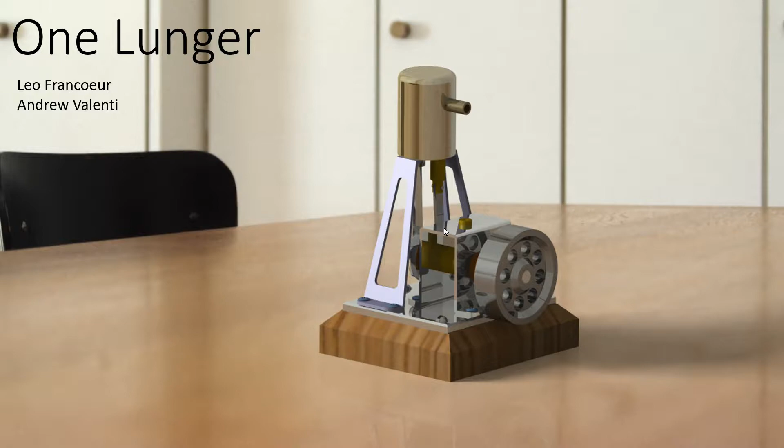The project that we did in Section 1 was the one-lunger engine. The one-lunger engine is a single-piston, four-stroke engine. This particular one is a model. Here you can see our assembly fully put together.

As you can see, there is one piston pumping up and down, and another yellow piece pumping up and down, which is a valve which allows fuel to enter and exit the engine. As we go below it, you can further see the piston pumping up and down at a faster rate than the valve, allowing for 2 strokes for every 1 stroke of the valve, as this is a 4-stroke engine.

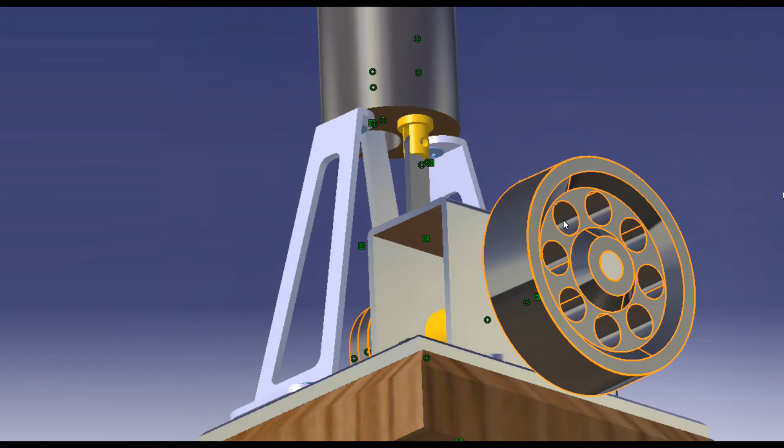As we continue to watch the engine turn, you can see all the parts that hold the engine together, including 2 cylinder holding brackets, and a bearing bracket to make sure that the flywheel stays straight the entire time.

For the part design of the one-lunger engine, most of the base features of the parts were cylindrical in shape. So the shaft tool was mainly utilized to rotate a profile, and then features were added to the part, most commonly holes for screws to fit through or shaft bearings.

The most difficult piece to create in this project was the cylinder holding bracket, mainly because it was missing fillet dimensions, as well as its widthwise dimension was incorrect with allowing it to fit inside the assembly with the other pieces, so the dimensions had to be slightly modified for that one width.

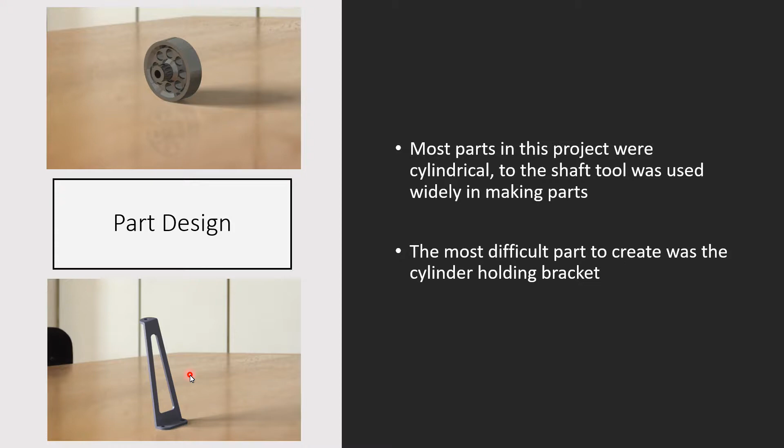As Andrew just mentioned, the cylinder holding bracket had several incorrect dimensions, or dimensions that were incorrectly defined, or conflicting dimensions. One of the dimensions that I would like to bring to your attention is this 17 right here. This view here was provided to us in the dimension drawings that were provided for us to create the parts. It took us a while to figure this out, but this is actually an unfolded sheet metal view. It's something that's commonly used in sheet metal design, but not commonly used a lot of other places.

So this 17 here actually has the length of the flat surface, like an auxiliary view would, of the actual slanted plane, along with the top view of the flat plane here. You can kind of see down here what I'm talking about. So the 17 would go from about there to there, while the rest of it would be this 8.8 here.

Now, one of the dimensions that was actually incorrect about this part was the 30 millimeter dimension here. Originally, this dimension was 30 millimeters, when in reality, it should have been 30.4. We figured this out when we tried to put the piece together in assembly design and realized that this screw here didn't line up with the actual cylinder that the piston went into. So if our screw holes aren't lining up, then obviously the part must be wrong.

Then we had to go back and spend several attempts trying to figure out how to finally make this piece correctly. Eventually, once we realized that this dimension was incorrect, it became a little bit easier and our holes lined up, and we were able to figure out what was happening with the part.

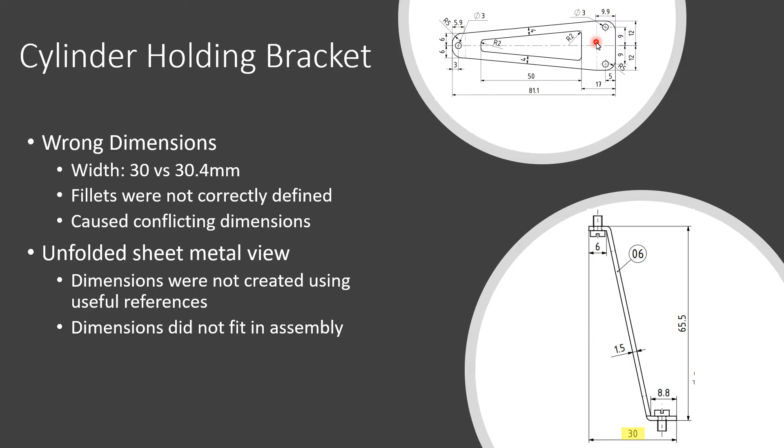As I just mentioned, that unfolded sheet metal view isn't really helpful in machining this piece or in modeling this piece at all. The better way to go about dimensioning it, as I discovered, was to make an auxiliary view. So these are my dimension drawings that you see in these 2 little bubbles. The first one is the front view down here, and then I also made an auxiliary view AA over here,

which allowed me to properly define the top of this little cutout here to the bottom of the piece, as well as the bottom of the cutout to the bottom of the piece, and the thickness of the walls. That saved me from doing a lot of trigonometry and a lot of extra unnecessary math in that unfolded view.

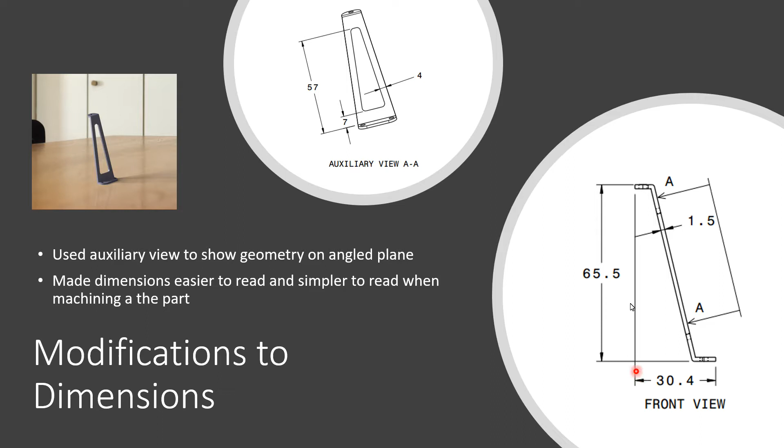Yet, still, I can get the same information that I could have gotten out of an unfolded view by getting dimensions like this 65.5 and this 30.4, which has been corrected since we had issues with it being 30 millimeters previously.

The main assembly for the one-lunger steam engine was broken up into 5 individual parts in the assembly, as well as 3 sub-assemblies. The first of the 3 sub-assemblies is the frame of the engine, which consists of static parts that are concentrically constrained to keep them concentric with the screws in the holes, and contact constraints to have the surfaces touching that will be screwed together.

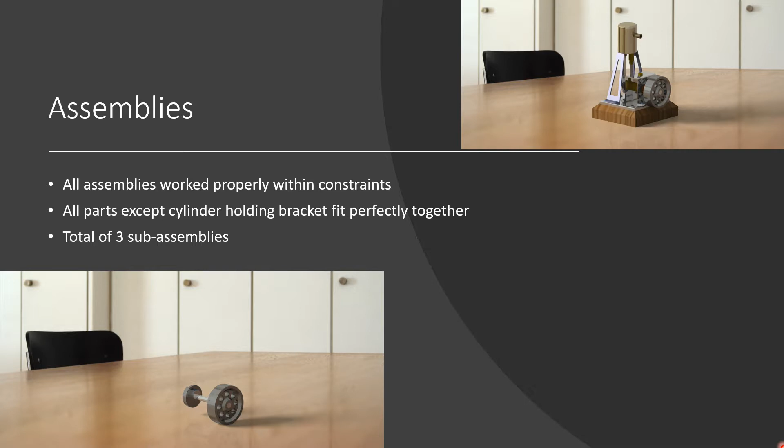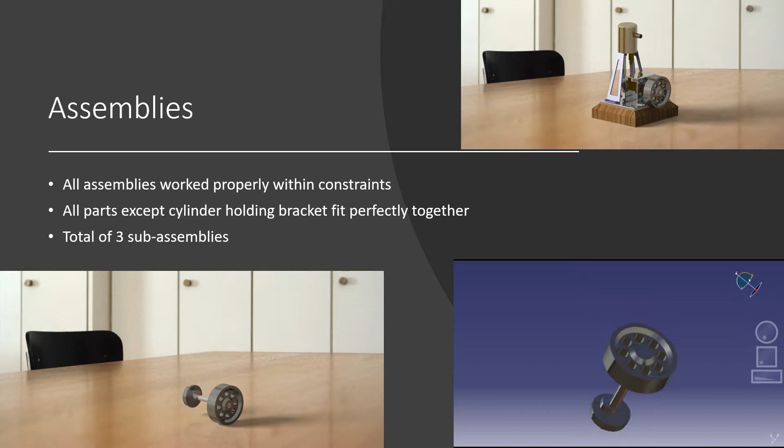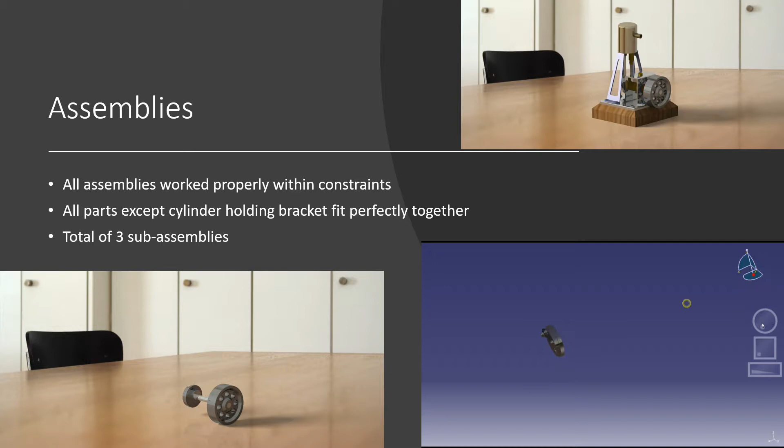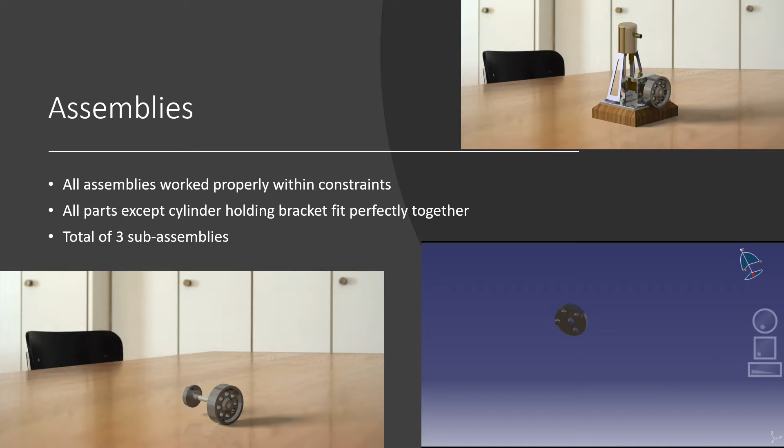The second assembly is the shaft assembly, which uses the concentric constraint to have everything centered around the shaft, as well as an offset constraint to position everything accordingly, as well as angle constraints to have everything properly offset angle-wise from each other. The third assembly is the crank plate that is actually inside of the shaft assembly, and it is the counterweight and the main part of the crank weight fastened together with 3 screws.

As I had stated earlier, one of the goals of dimensioning that we had was to make all the parts easier to model and easier to machine. One of the big issues with making parts easy to machine is not calling out the center of holes from edges. A lot of times when we were looking at the dimensions that we had to make the parts, we noticed that holes were being dimensioned to the edge instead of to the center. Obviously, you can't put a drill bit on the edge of a hole and expect a hole that has a center a little off from that. That's not how drills work.

So we dimensioned everything to the center lines of holes and did our best to do symmetrical dimensioning for pieces that were symmetrical along one or both axes. A lot of the dimensions that we did were hole dimensions and hole callouts, as this particular project had so many holes and so many threaded holes that needed to be called out in dimensioning. Dimensioning in this project was time-consuming, but not overly difficult. Like I said, a lot of it was just changing the dimensions that were already existing into dimensions that were more readable and baseline dimensioned instead of chain dimensioned.

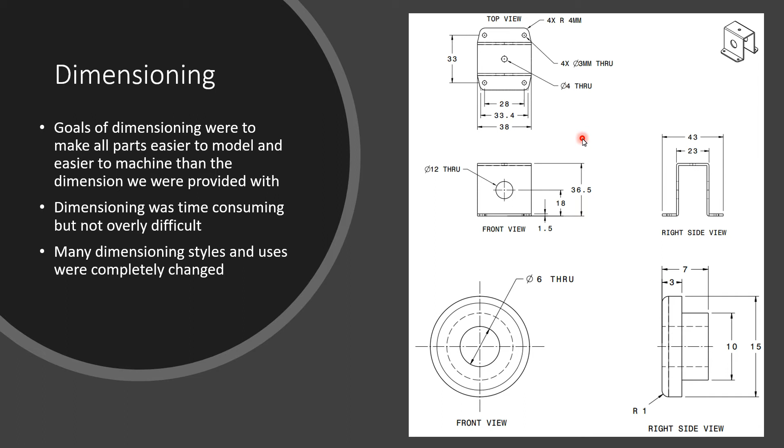Like I said, the dimensioning style was changed a lot. A lot of the pieces had these weird views, some weird cutout views that didn't really seem necessary, and then other pieces that didn't have offset sections or cutout views at all that we deemed it necessary to have them with. But overall, the dimensioning on this project was not too difficult. The isometric views were added to visualize the parts all assembled together.

The bill of materials was created based off of assumptions of what the materials probably were for each specific part, because the sheet we were given with all the dimensions did not have any materials listed on them for us to work with. So what we went with was having most parts being made of iron, while all the standard parts that were in the engine were made of steel.

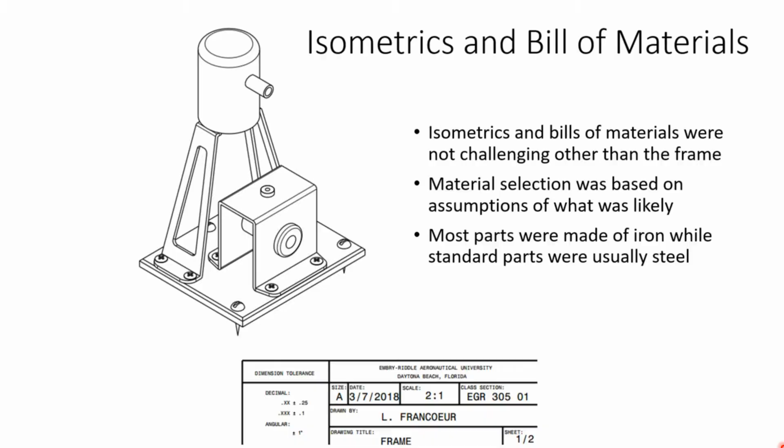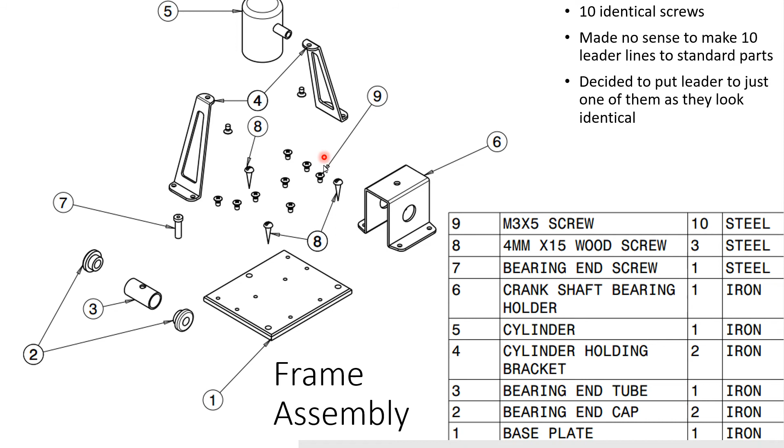The exploded views are added to easily identify which material is what on the bill of materials with balloon leaders. Generally, the balloon leaders are added to each of the parts individually, but we had 10 screws that were identical, so rather than have 10 balloons or 10 arrows coming from various balloons, we decided to just label one of them to avoid over-cluttering the drawing. As far as team dynamics went on this project, there were really no issues.

The general theme was borrowed from Nike, kind of just do it. For the most part, we kind of just partitioned up work based on who had more free time. Towards the beginning of the semester, Andrew had a lot more free time, so he did most of the original parts, whereas later in the semester I had more time, so I did the drawings. Overall, the theme was whoever had free time can work on it, and whoever didn't, not to worry about it until we had to.

We utilized OneDrive to pass files between us. When we finished our respective parts, we would upload them to OneDrive so that the other member would know what we had done and what still needs to be done for the remainder of the project. Because I had more time at the beginning of the semester, I started off doing a majority of the parts, while Leo did a few in his spare time, and then afterwards I created the assemblies.

Then, like we said earlier, I made the dimension drawings and put them on sheets, and I created the exploded views along with the bills of materials and isometric views on the drawing sheets for our project. I was the primary creator of this presentation. And I was the primary writer of the written report.